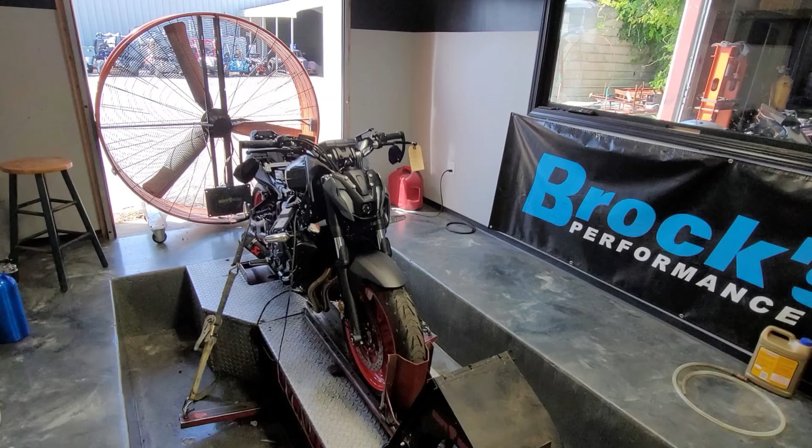For those of you who don't know, my name is Chris Moore, and in today's video we got a 2021 Yamaha MT07 that we just installed an Akrapovic full exhaust on. This bike is brand hammer new. The pipe is brand hammer new as well. Look at that. Can you see it? Yep, you can see it just a little bit.

The pipe is smoking a little bit where we got the bike hot with the exhaust on it for the first time. So this muffler's still kind of breaking in, burning the new off of it, but overall, what an improvement this has been from the factory exhaust system. The factory exhaust, super quiet and super restricted with the catalytic converter and stuff in there. We have removed all that stuff, and this thing definitely has got a really good sound now and should be a big improvement on horsepower.

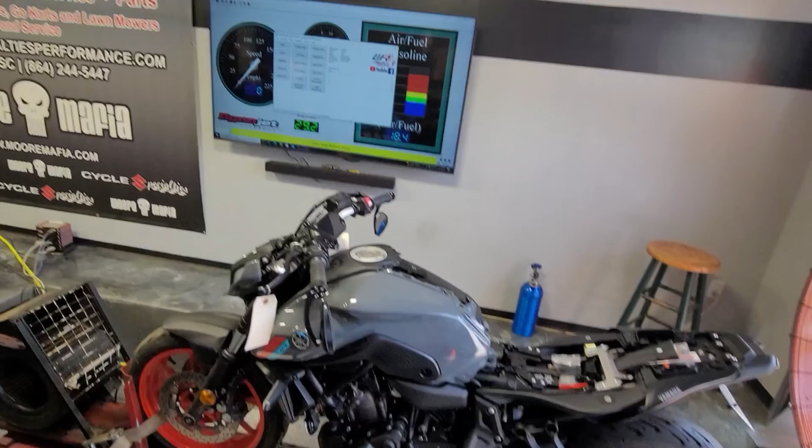Unfortunately, we did not get to dyno it with the factory exhaust system, but we're going to be unrestricting the ECU in this thing, dialing in the air-fuel ratio, and smoothing out the on-off throttle problem these bikes have. When you let off the throttle, boom, crazy heavy engine braking. The thing falls on its face, wants to throw you forward. We're going to reduce that. I'm going to get into some more details about how we're going to do that and what we're going to do to improve this thing here in just a second.

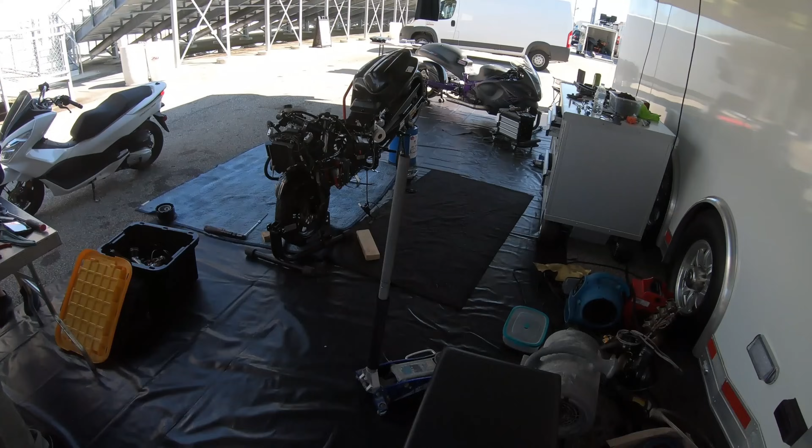Okay, so we got the engine all warmed up. We're about to do the baseline pull. We haven't changed anything on the tuning side yet. We're gonna run it and see what kind of power this thing puts down. Also keep an eye where it says air-fuel ratio. That's how rich or lean the bike is running. Right now, 18.4, that's as lean as the dyno will read. In other words, it's full lean because it's not running. The lower the number, the richer it is. So 10.0 is richer than 13.0.

Anyways, we want to be in the 13s, but just keep an eye on how lean this thing is cruising around. That's where you'll get a little bit of that throttle surge, especially once you put the exhaust on. I'm sure it's not super bad from the factory. They all have that decel fuel cut option, meaning when you let off the throttle, they all nosedive. So that's even if you have stock exhaust or aftermarket exhaust. When you put aftermarket exhaust on, it's a little more amplified because the bike is much leaner. We're going to correct all that, take a look, see what we can get.

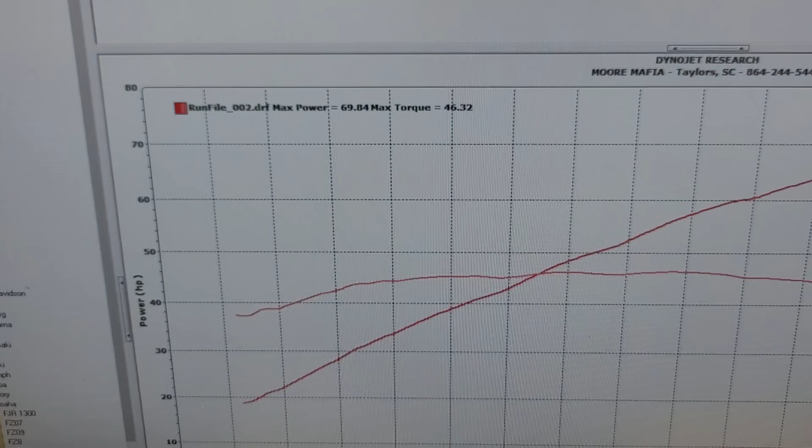So as you can see, we ended up with 69.84 horsepower and 46 foot-pounds of torque. You can see the bike is fairly lean, meaning not getting enough fuel throughout the whole entire RPM curve. We're gonna correct that with this ECU flash. There's not tons of restrictions in the, I guess you would say, throttle plates. This bike doesn't have an electronic throttle. So you don't have those restrictions like you see in some of the ECUs.

Where we're going to be able to make improvements with this bike is in the air-fuel ratio and with the ignition timing. We're also going to be able to lower the fan temps, and we're going to be able to turn off that pesky decel fuel cut so the bike will ride much smoother. So we're going to gain horsepower, not tons, but we're gonna smooth this thing out a lot, and I think we're gonna gain a good bit of power in the low end that you're gonna see right in here.

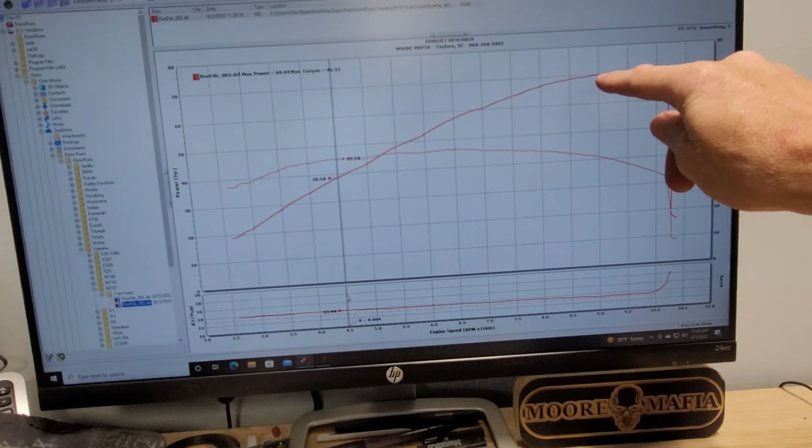This bike, it doesn't really do any good to rev it any higher because it makes its peak power at 9,000 even though it revs to 10,000 from the factory. So you're not gonna really gain anything by revving it higher, and where it makes the peak power, this 69.84, the air-fuel ratio is not far from being perfect right there.

So our peak number is not gonna go up a lot, but we're still gonna get big gains that we may not necessarily see on the dyno. Show you here in a second. Okay, we're making some good progress with this thing. The bike is smoothed out a ton.

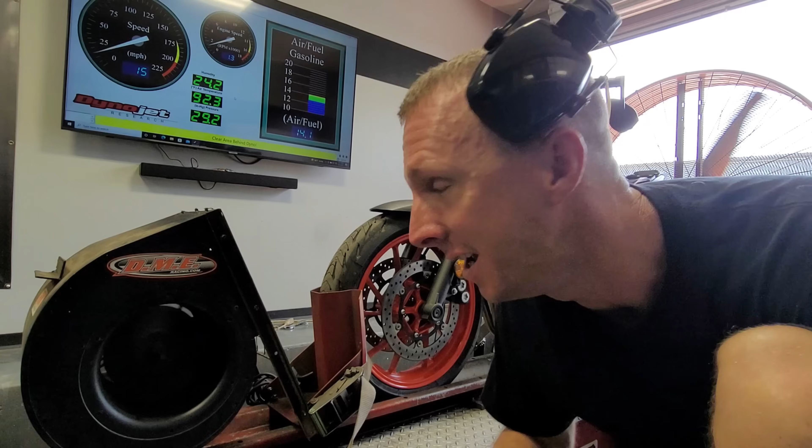If you'll keep an eye on the travel of the forks here, you'll see when I let off the throttle, it doesn't nosedive anywhere as bad. And of course, this is not a perfect example of what it would be on the street because of the actual engine braking. It's gonna be much less on the dyno because the drum is not as heavy as the bike and the rider. But you can still tell a really big difference in how much better it sounds, how much better it accelerates. Everything is going in the right direction. Listen to it and let me know what you think.

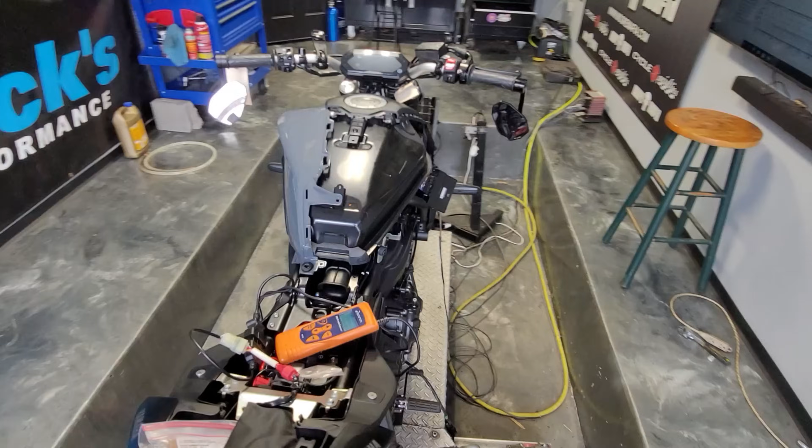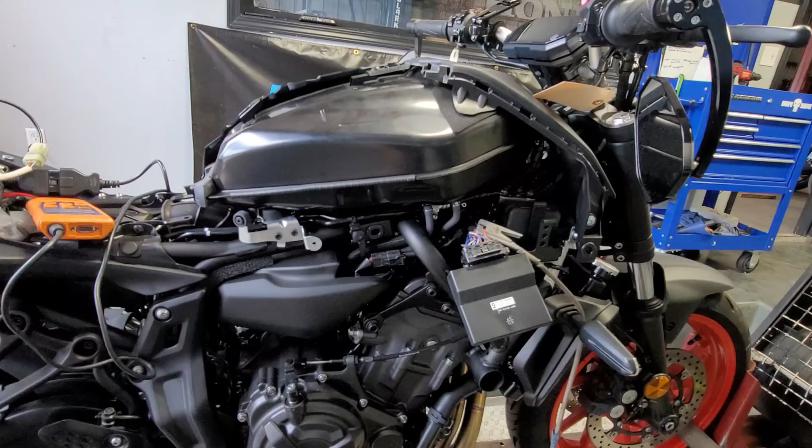Just like that, we're finished. We have got the gains on the screen. Before I show you this, I'm gonna show you one more quick thing. Once we flash the ECU on the bike, the ECU is located right here. It sits in a little pocket right there. You do have to pop this little cover off. Not super hard. Takes about 20 or 30 minutes for your first time doing it.

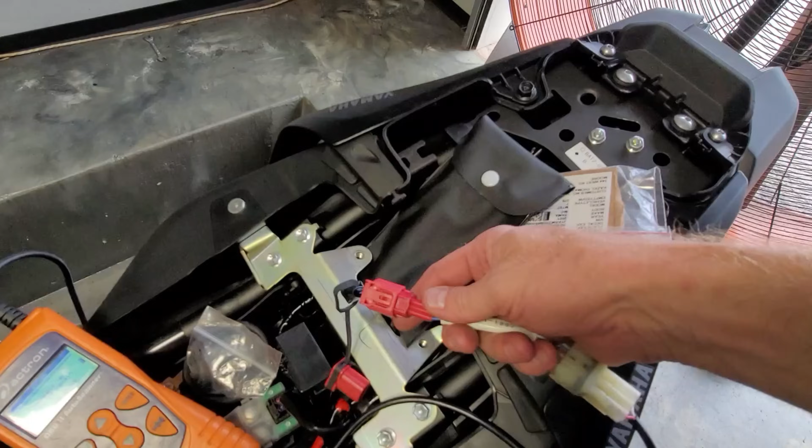But if you take the ECU off on this thing and put it back on, you're gonna have a check engine light, okay? Pretty much all Yamahas are like that. The check engine lights will not clear out on their own either. So I sell this little trusty adapter. This thing right here is on your bike. Hold on a second, I had to use my hand. This little adapter right here plugs into the factory existing adapter that you have here.

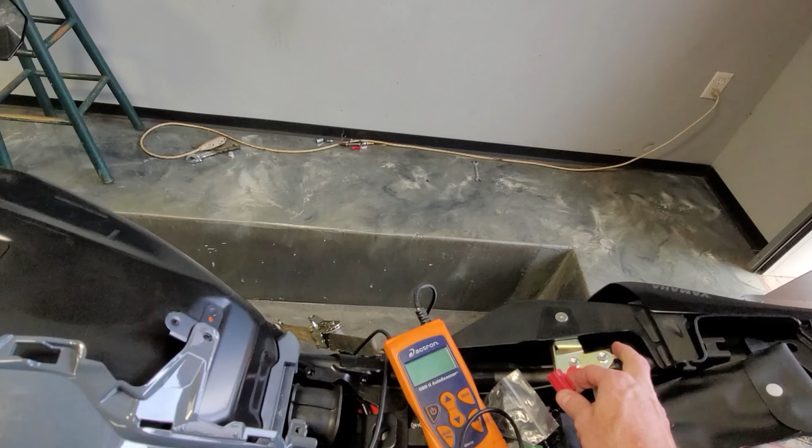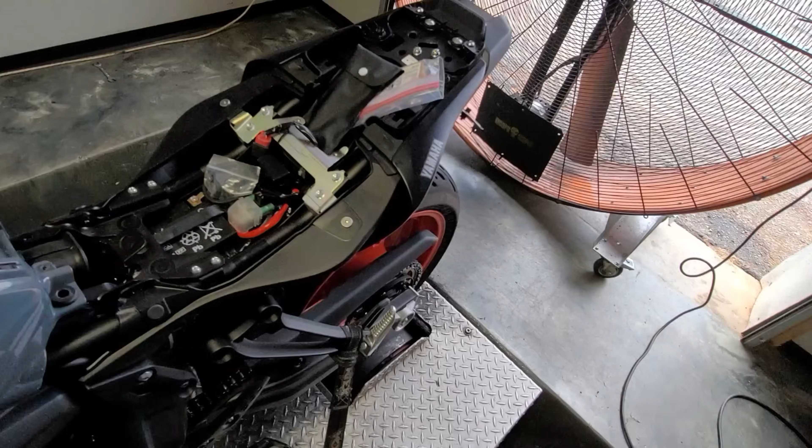Now, you can clear the code on your own after you buy that, or you can take it to your Yamaha dealer and they're probably gonna hit you for about $100 just to clear the check engine light out. God forbid you do something else to the bike, the check engine light comes back on, boom, there's another hundo down the drain. Get the little adapter yourself, you can clear it on your own. Now you can do simple maintenance and procedures on your motorcycle, and that adapter will work on pretty much all the new bikes.

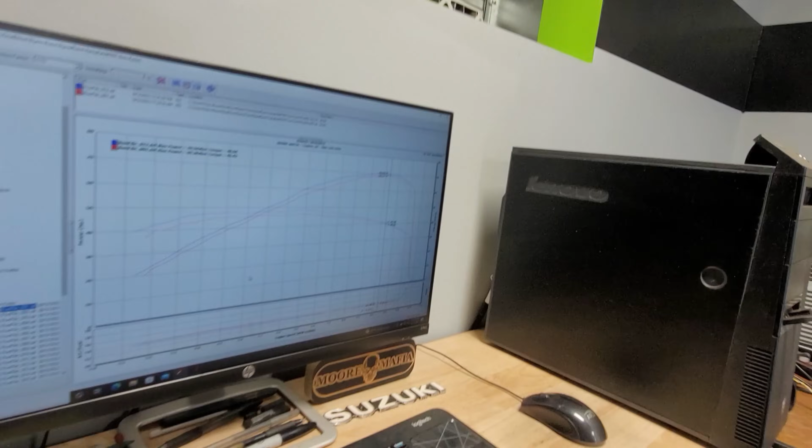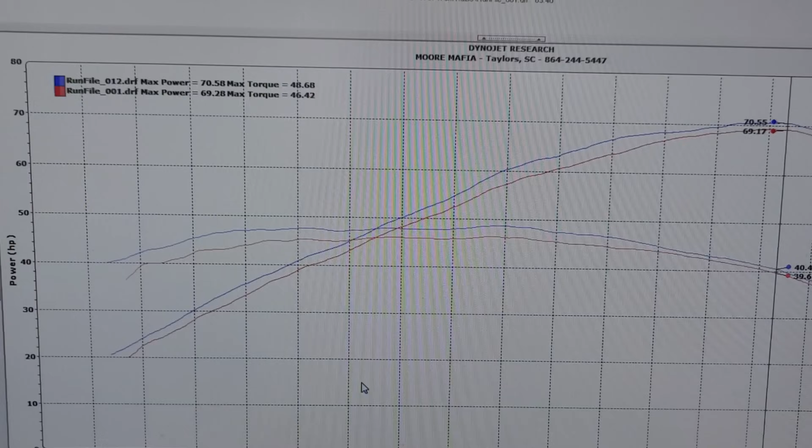So overall, now look at what we gained. We got a whopping 70.58 horsepower. Now I know you're like, Chris, 1 horsepower? Come on, dude, you know that's not worth it. Well, actually it is, because in the mid-range, we gained a bunch. Now, how many of you guys have MT07s and run it wide open at 9,000 RPMs 24/7? Not many of you. A lot of you guys are using these things for commuting, getting back and forth to work, and just having fun.

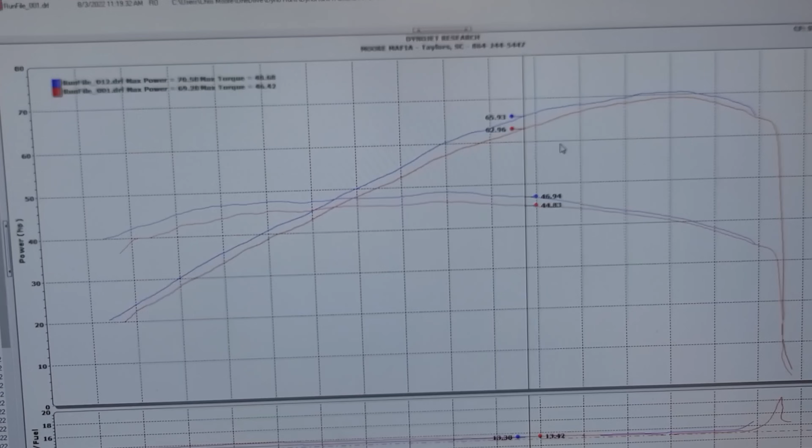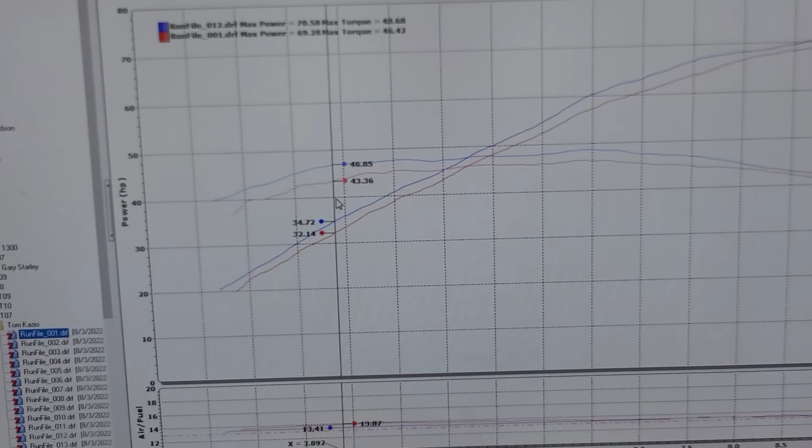This 5,000 to 7,000 RPM, 8,000 RPM range is where you're gonna be a lot of times. So you can see here we picked up 3 and 4 horsepower throughout the entire RPM curve. And then if you go down here to, let's just say 3,500 RPMs, 4,000 RPMs, we went from 43 foot-pounds of torque to 46 foot-pounds of torque. So percentage-wise, that's about a 10% gain. Not too shabby for the inexpensive price of an ECU flash.